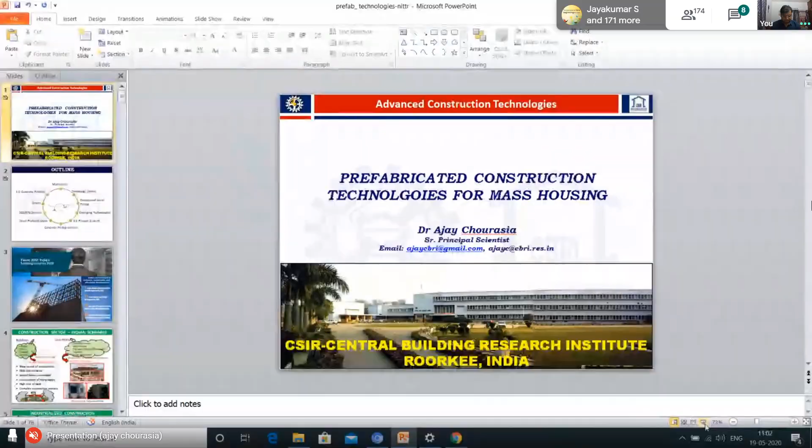Your mic is unmuted, actually. Unmute the mic. Yes, sir, your microphone is mute. Done. Okay. So now, am I audible now? Yes. Thank you so much. So, okay. So, shall I start now?

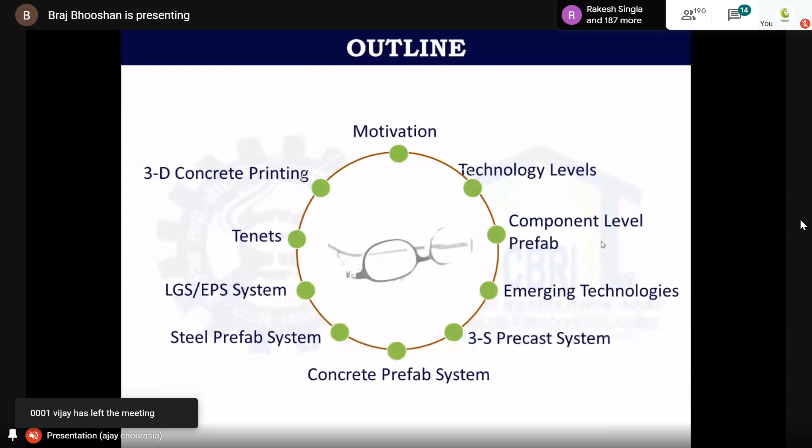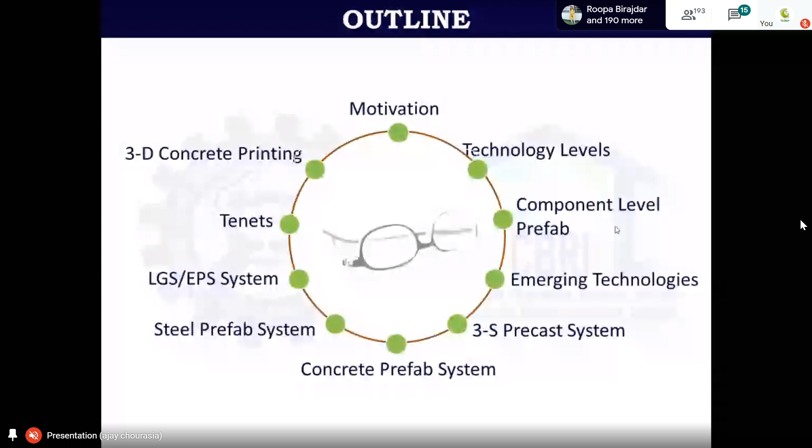Thereafter, there are different types of emerging technologies in prefabricated construction for housing or any building industry. That can be separated out in terms of the material used, that is concrete, steel, or light gauge steel, and different kinds of material for non-structural members like light gauge steel, EPS, and all. And then we will discuss certain things about the Tenets, what is the requirement for getting all these technologies into practice. Then the way forward, advanced technology, next generation technology, that is still at the evolution stage, that is 3D concrete printing. And at the end, as usual, a conclusion or summary.

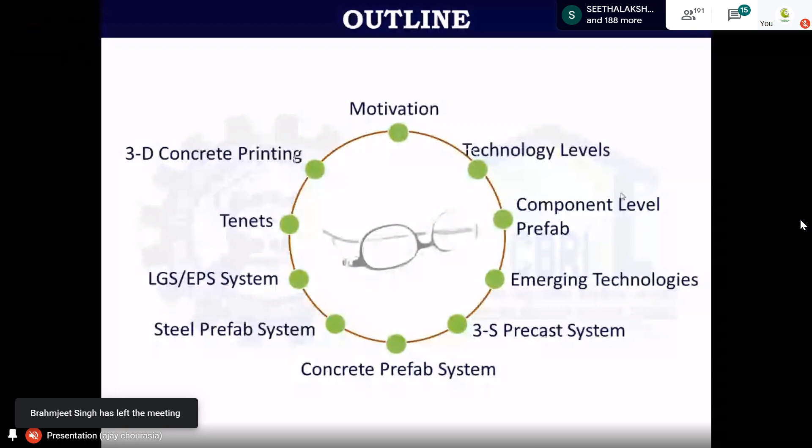So to begin with the formal presentation, I will put keywords for this particular presentation. It is on prefabricated construction, as directed to me by Dr. Goel. That is, the keywords are prefabricated construction, technologies, and mass housing. So my presentation will revolve around these three keywords only.

So when we are talking about mass housing, you know the Government of India has launched a very ambitious program on mass housing, that is Housing for All, which caters to the housing needs of the lowermost person or common person who is lying in the bottom layer of the pyramid from socio-economic considerations.

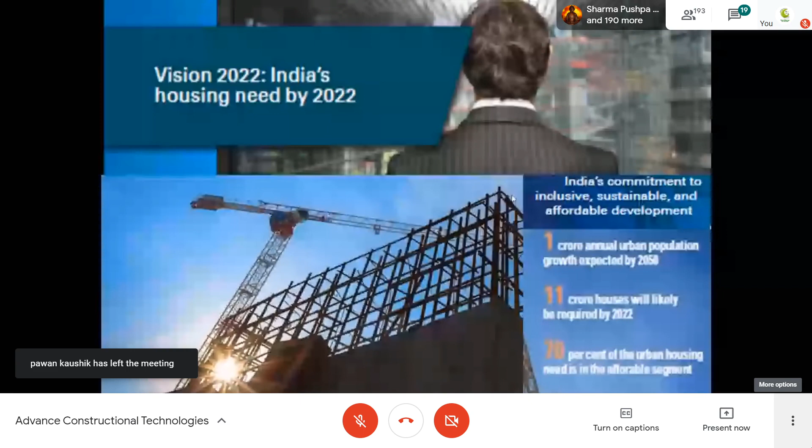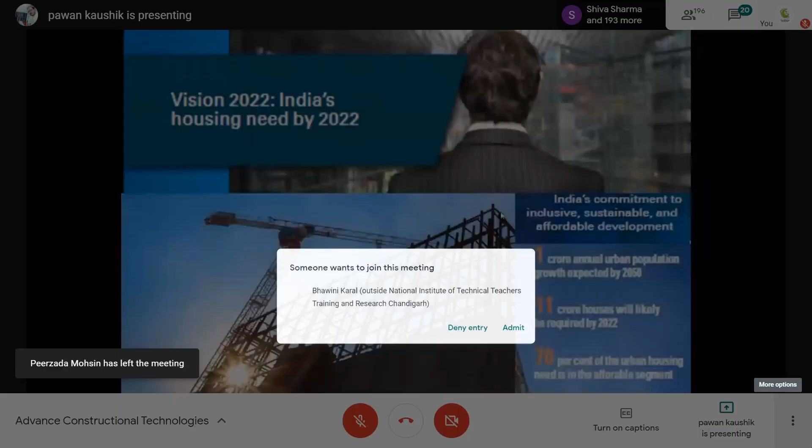So with this, the statistics say that our country is passing through a shortfall of housing for economically weaker sections and for the middle income groups. That has been again divided into two, that is urban and rural. In urban sectors, by 2022, we need at least 11 crore houses to be constructed, and this figure will go on increasing by 2030 and 2050, if we extrapolate it, by a tune of around 2 to 5 fold respectively.

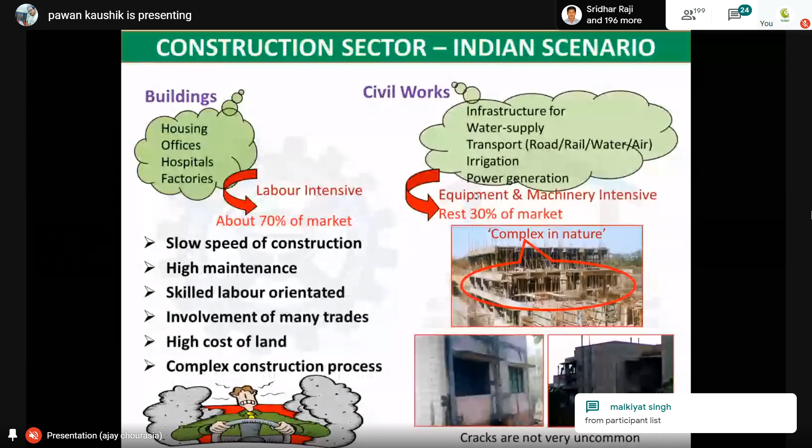Similar things are also reflected in the rural sector. So when we see this particular demand, and we have very good ambitions, and if we follow the present construction scenario which we are now practicing: if we look at the construction sector in India, 70% of the market share is in buildings, and the rest, 30%, is for civil infrastructure development.

And as you know, in the present scenario the construction sector is one of the key sectors or key verticals contributing to national development in terms of GDP, having around 12 to 15% share in the GDP of the country. If we strengthen this particular sector, definitely it will take our country to newer heights. And for that purpose, we have to intervene with technologies.

We are following traditional construction, or cast in situ or monolithic construction, which has a lot of impediments or shortcomings, I should say. The conventional technologies suffer from slow speed of construction, high maintenance cost, and are skilled labor oriented. It is a multidisciplinary approach with involvement of many trades, high cost of land, complex construction procedure, and quality control and quality issues, all in parallel.

So if we follow this similar trend, and on the contrary look at the demand we have in the housing sector in the country, it is a huge demand, and with the present pace we will be able to address only 15% of the construction, and due to this a huge backlog will be created. With this speed, to meet the target it will take at least 10 to 12 years. And what will happen to the backlogs generated during these years?

Certainly the supply is not commensurate with the demand, and for that purpose we need to go for technologies, and prefabricated or precast technologies are very important. We support these technologies for the simple reason that they are easy to handle, easy to transport, easy to cast. And for achieving this, we have to streamline our working style: standardization and modularization of construction systems, plans, designs, and housing systems should be done. To a large extent, it has been addressed in the NBC 2016.

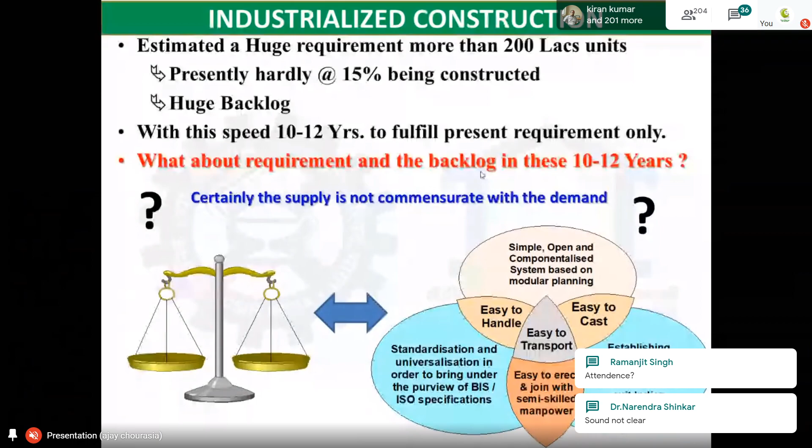Similarly, we have to take a multidisciplinary approach so that there will be good coordination between electrical, plumbing, and other things, because most of the problems in existing buildings arise from poor coordination between different verticals. If we look at the Government of India's Housing for All mission, the government is also looking for technologies that deliver disaster resilient housing.

So these are basically the needs: resilience to disaster, fire, landslide, rainfall, flood, and everything. Better quality of construction, low maintenance, speedy construction, cost effectiveness. Sustainability is nowadays given more impetus, that is, environmentally friendly materials should be used. Energy is also very important, and there should be a low carbon footprint.

Our Honorable Prime Minister Modi ji inaugurated the Global Housing Technology Challenge in Delhi, in which 16 technologies have been selected, identified, and classified as proven. Please try to understand the difference between technologies and proven technologies. Proven technologies are those which meet these needs, and only those technologies are recommended for use in practice, so that whatever our common people get, even if the building technology is new, it should be proven, so that tomorrow there is no blame game.

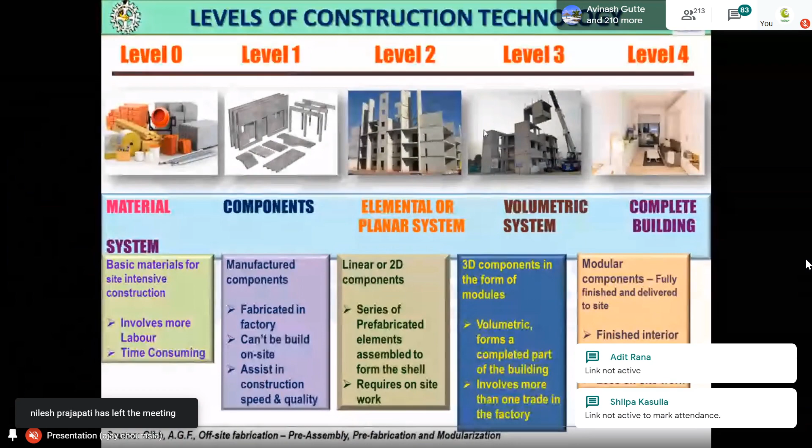So the way we are moving from level 0 to 1, definitely speed is achieved to a large extent. In all cases, we have to ensure that safety is addressed properly. Apart from that, sustainability, rebuildability, and reconstructability should be addressed. So we have to take it as a whole to reach level 3 and 4 with all our contribution.

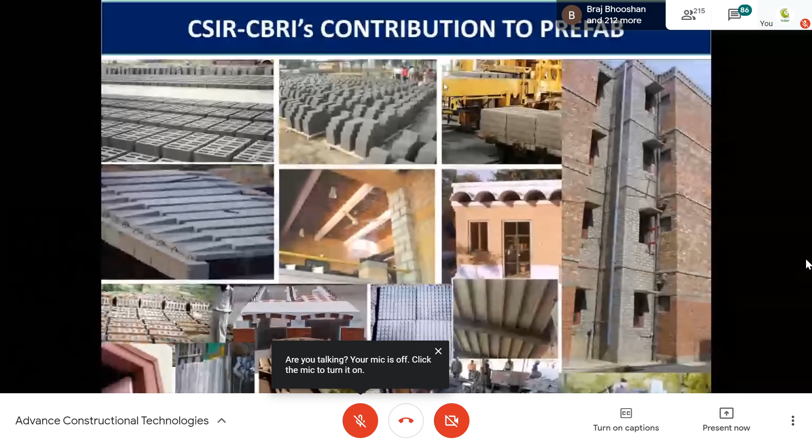So for that purpose, CBRI already envisaged all these aspects 3 decades back, and brought out different prefabricated or precast technologies, but again, it was on a component level. That is hollow concrete blocks, lightweight blocks, RC plank joist systems, brick panels, roofing systems, and at the same time, to increase the manufacturing process, semi-mechanized production of precast building components has also been done to a large extent.

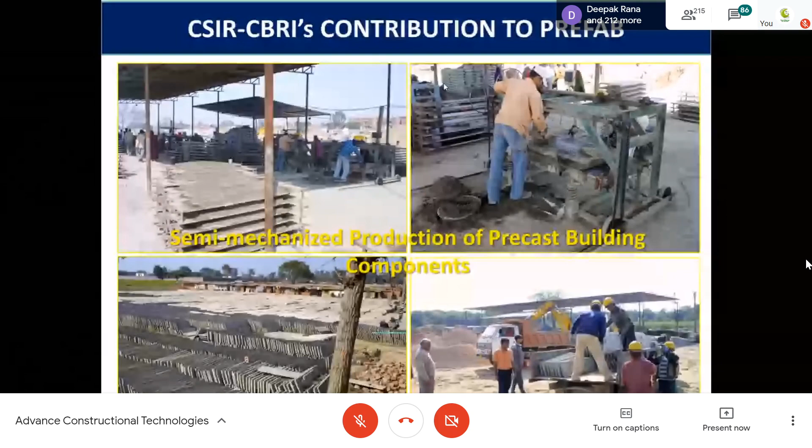So the advantage of these precast construction technologies is simple: it is done under strict quality control. The mechanization is in between, and with standardization and modularization you have to be very careful, and extra careful during transportation. If you don't take proper considerations, then minor hair cracks or damage or distress to the component are likely to happen during transportation, so you have to be very careful on this front.

So mechanization has also been embedded in the technologies developed at CBRI, which have now been put in several locations across the country, specifically in the housing sector, in the urban and rural sector. I'm very happy to share with you that in the last 6 months, 3 lakh houses have been constructed in Orissa state using these technologies, and importantly, in the latest cyclone they performed exceptionally well.

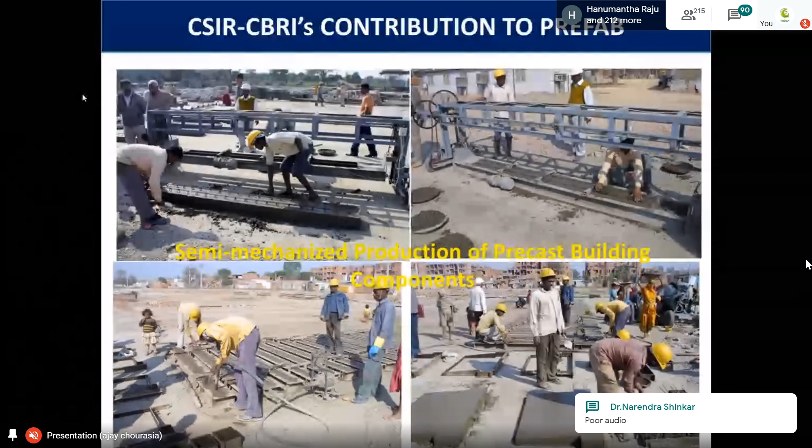And whenever you are bringing any technology to the common man of this country, you have to be extra careful that it should be socially and societally acceptable. Whatever technology you give, ultimately he has to spend his life in it, and if it is not meeting the comfort level and functional needs of a common person, then it makes no sense.

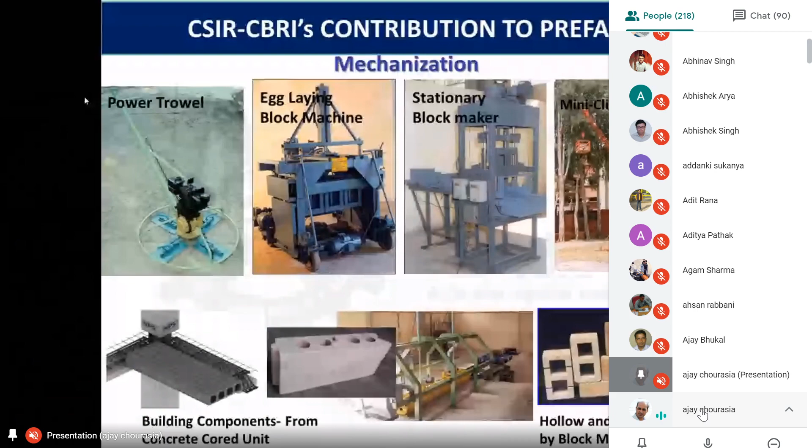So apart from this, some mechanization has been done by CBRI to give accelerated speed to the construction process by making use of power trowels and egg laying machines. So basically it is a manufacturing process of the blocks, then stationary block making machines, then mini climbing crane, then hollow core units. So these are some of the building component mechanization interventions CBRI has done in the last 3 decades or so.

If we look from CBRI to the market, we will see a lot of things happening at the site, and it is up to the engineer in charge at the site to put these technologies to use, so that minimum intervention of manpower, speed, overall economy and safety aspects are addressed properly. So,

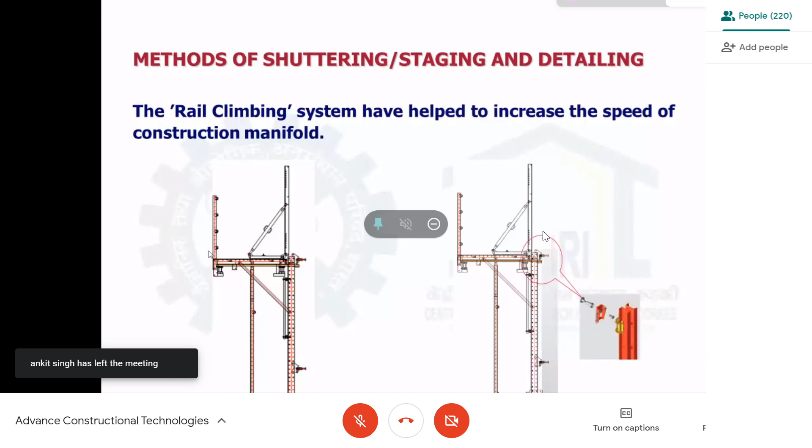So I'm sorry. So for that purpose, if we see the shuttering aspect, there are now technologies, and I'm again going by what is happening in the market. So rail climbing is another technology. A single person can handle this equipment and do its day-to-day work fast.

Then the method of shuttering. Gone are the days when we were depending upon props in terms of ballies or hollow circular pipes and all. Now there is a technology which is very light in weight, good in strength, very easily flexible. When you are varying the height of a building, that can be managed properly.

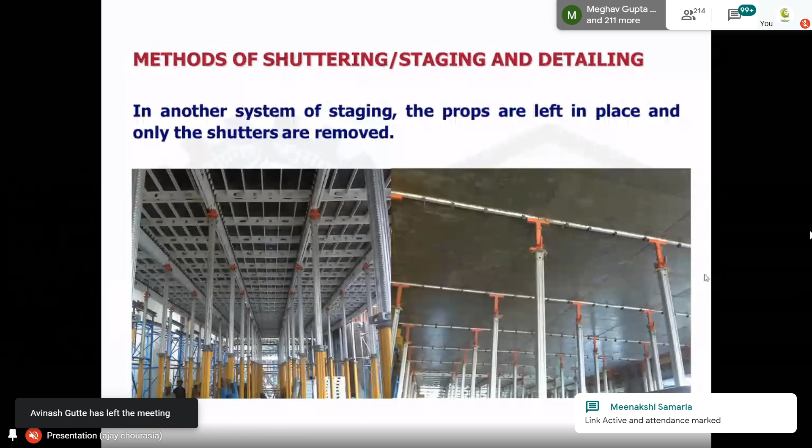And when you see the casting of a slab, what happens? Normally you will see, okay, the slab is cast, we will remove the shuttering after 14 days. Why? The code already says that you can remove the shuttering from the soffit of the slab after 3 days, depending on the span and other things, and you can keep the props for 7 days or 14 days, depending upon the span of the beam.

And what we do, because of lack of knowledge, we are keeping the entire shuttering for 14 days, 21 days. So many people have their own concepts, and as a result, our cycle time per storey is getting increased exorbitantly. But these are the new shuttering technologies in which you can remove the beam slab shuttering within the specified time, and you can leave the props as they are, and they are very flexible.

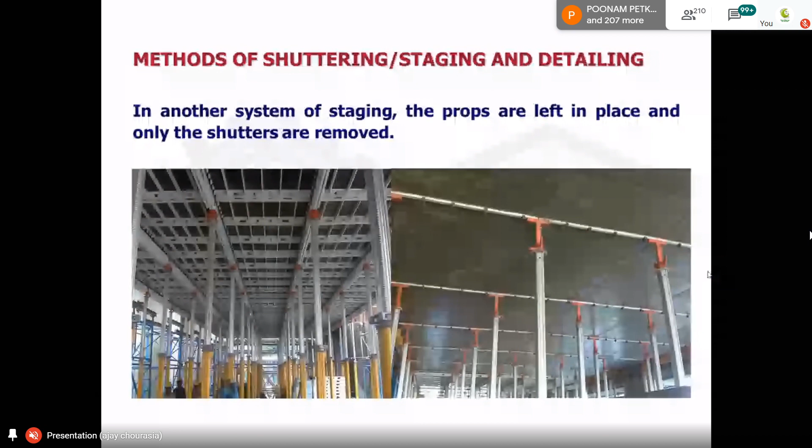If there is a variation in the storey height, most of the times you will see at the site people putting bricks as packers, 1, 2, 3, 4, I don't know how many, and most of the times accidents are happening just because of dislodging of those brick layers. So to avoid that, adopt the technologies, make your construction safe and get good construction output.

Another component which has been attempted is couplers. When you see reinforcement laying or connection of reinforcement in the construction sector, traditionally we are following lapping of the reinforcement bars. We lap by the anchorage length, that is, in case of M20 grade concrete, 48 times the diameter of the bar. And it is a very challenging aspect when we are going for higher diameters. Alternatively, we can make use of couplers.

Our IS 13920:2016 also recommends making use of these, subject to evaluation of the couplers from mechanical considerations. The advantage of using couplers is that, as our code 13920 suggests, laps should not be more than 50% at one particular section. But when you are using couplers, you can go for 100% at one particular location.

Now, what is a coupler? A coupler basically means the end-to-end connection of reinforcement bars. These are the couplers; they are internally threaded, and they are connected through the threading end-to-end to the reinforcement bars. When you see the cost economics, these are very feasible from 16 mm dia to 32 mm dia. But below that diameter, the cost efficacy doesn't work out.

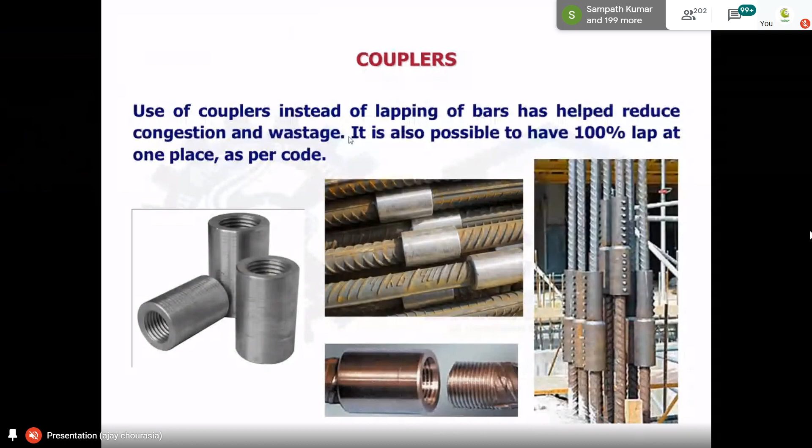Whenever you see the post-earthquake damage scenario, you will find that the beam column joints are most affected. The reason behind that is the reinforcement detailing given by the ductile detailing code 13920 is not being followed. Even if the designer gives it, at site it is unable to be attained because of congestion of reinforcement. Due to congestion, honeycombing happens, and as a result, you compromise the designed beam column capacity.

Most of the times you recommend that an L bend should be given at the joints, but at the site, maybe because of different reasons, it is not possible. It is ignored. What is the way out for that?

So we have designed a headed bar. Headed bars are basically a mechanical anchorage system. It is attached at the end of the reinforcement bars, and this is a very good application at the end span region. The reinforcement bar is inserted within the beam column joint at least to half of the depth, and it is connected either by threading or by forge friction welding.

And what is the novelty of these headed bars? Easy workmanship, cost effective, fast construction, enhanced bond capacity, better ductility, whatever the capacity you achieve by the headed bars for the beam column joints. And it can be implemented in cast in situ construction as well as precast construction.

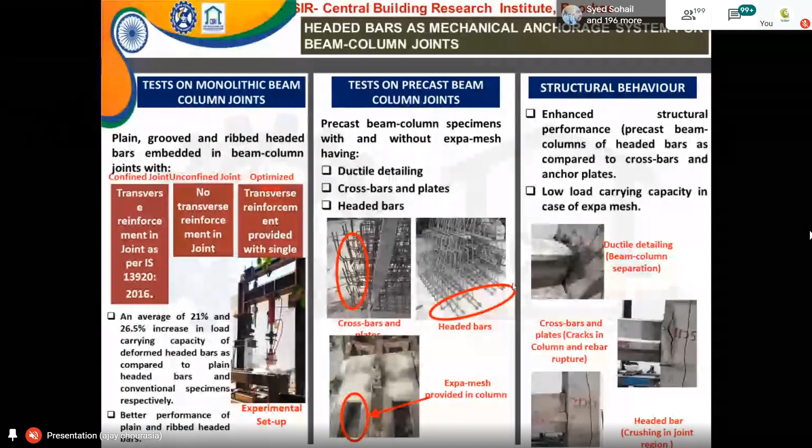So when this technology was evolved at CBRI in the last 1 or 2 years, before bringing it to the code, it had to pass through different tests. So we have conducted several tests on this, and as a result of the tests, the techno-economic feasibility also we have worked out.

So here we have observed that these coupled headed bars, techno-economically, without compromising the capacity of the beam column joints, are very feasible for bars more than 12 mm diameter, up to 32 mm diameter. As a result, the saving is very small, around 5%, for 12 mm diameter, whereas it is to the tune of 60% when you are using 25 to 30 mm dia bars. At the same time, it is adding speed and other quality aspects.

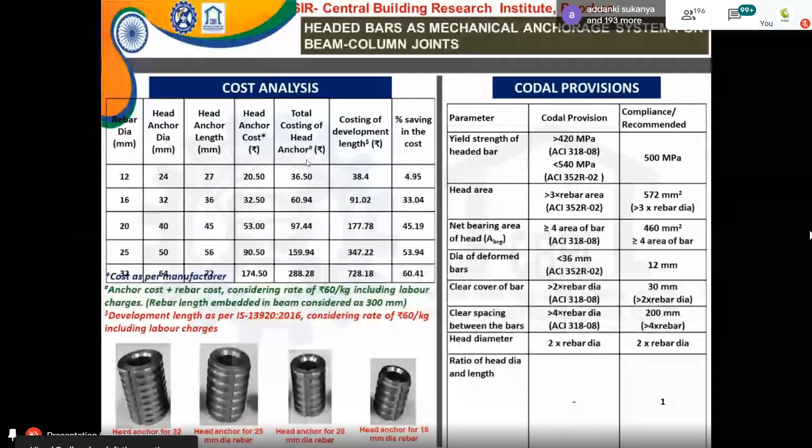So this particular technology can also be implemented for getting better beam column joints in our building systems. Because whether it is a building or a human being, joints are very critical, very important. So that's why this is one of the new innovations which we have added recently, and this will be embedded within the code of 2020, which is under development.

Now, again, when we need to add speed to construction, mechanization is the only way out. This will reduce the manpower requirement, and safety and speed will also be added to our prevalent construction technologies. You see cranes being used in high-rise construction by big contractors. We want to make these cranes affordable for two-story, even three-story buildings. We very rarely see cranes being utilized for 2 to 3-story buildings. But with technological interventions, we made it.

In this, you don't require a huge platform for installation. The cost is also low, and you can mount this crane on the floor, and it can be movable also. The capacity of the crane can be varied. We have designed it for 4 ton per meter, which is within the normal construction of housing sector buildings. So we are naming it an affordable mobile crane.

Apart from that, when you go for finishing of a building, a plastering machine is also very important, which we have developed. Again, it is cost effective, and it is portable. It gives a good finish, very fast. And the USP of this plastering machine is that if during plastering you come across any opening, it is embedded with sensors. Whenever the opening comes, the sensors will not allow the pump to spray the plaster mortar on the wall. As a result, you reduce the wastage, and it is adding speed.

And what is the process? The tray is moving from bottom to the top, and whatever rebound plaster mortar you get, we collect in the tray provided at the bottom. So wastage of material is also reduced, and it is affordable. There are several plastering machines available in the market, but this is something different and can be adopted very easily in ongoing housing sector projects.

Then, more prevalently, we are used to using burnt solid clay brick units for walling systems. But nowadays, if we follow brick units, it will take a longer time. So alternatively, there are a number of products coming in. That is AAC, autoclaved aerated concrete blocks.

We have come out with lightweight cellular concrete panels, almost 600 mm long, 140 mm or 200 mm width depending upon the loading, having good compressive strength. In between, it is made hollow, so the weight is reduced, and it accommodates the reinforcement bar and connectivity along horizontal as well as vertical direction.

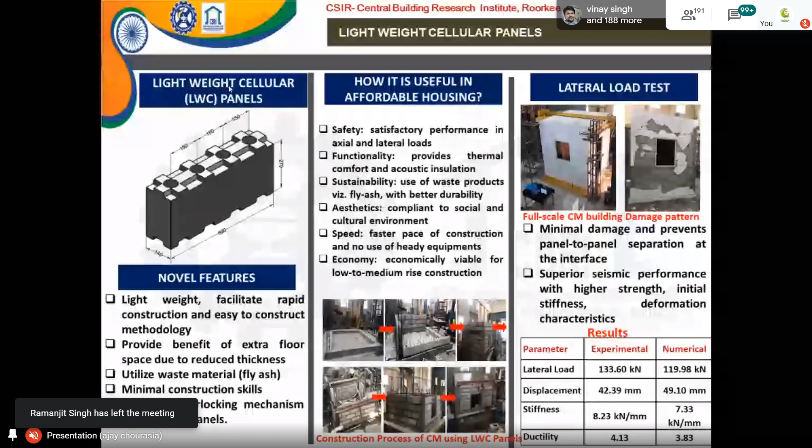What is the USP of these blocks? It is basically safe for axial and lateral load, very fast in construction, and good from a functionality aspect in terms of thermal and acoustic insulation. Sustainability is a very important aspect we have added, because it makes use of a waste product, that is fly ash, with good durability.

Aesthetic is also better, with very good interlocking between the units, and it gives enormous speed. If you are making any construction by conventional practice versus using lightweight cellular panels, you will definitely save to the tune of 70% of your time, apart from 20% of cost.

So this is a promising technology which can be used either as infill walls or for load bearing structures as well. For that purpose, we have gone into various kinds of tests, which I will not go into at the moment.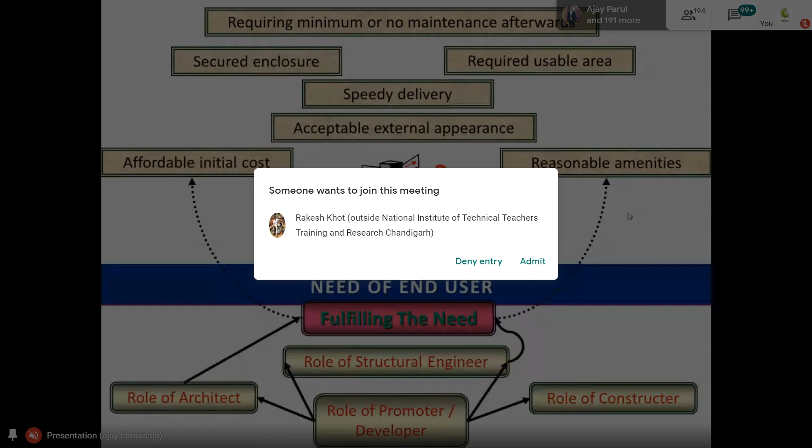Now, after learning these technologies on the component level or mechanization point of view, we need to go from component level to system level. But before going to the system level, we need to understand the end user's requirement and thinking, because he is my customer. For that purpose, what he looks for is affordable - economy is the prime concern.

Thereafter, he wants speed, then acceptable external appearance, comfort level, thermal and acoustic insulation, reasonable amenities it should embed, required usable area it should get, the enclosure should be secured, and it should require minimum to no maintenance afterwards.

To meet the aspirations of the user or common man, we need better coordination among different stakeholders. Who are the stakeholders? The owner is already there, but apart from that, architect, structural engineer, government has to also be on board, and the role of the promoter, developer, builder, constructor - everybody has to sing in the same tone, then only my customer will be happy.

So with these basic requirements or prerequisites, you have to address them through technological intervention on a system level. For that purpose, we again have to take help of technologies. When we look at technology on a system level in our country or across the globe, we see there are majorly three verticals.

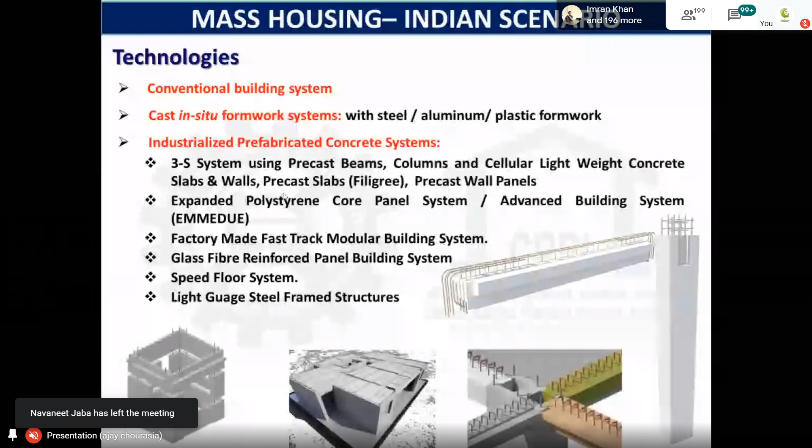Apart from that, there are other technologies - expanded polystyrene core panel systems, fast-track modular systems, GFRG, speed floor construction systems, which basically make use of steel structure building systems with any kind of infills, light gauge steel frame buildings, and stay-in formworks are always there. When the Ministry of Housing and Urban Affairs looked broadly at that, with CBRI also part of that selection process, we outlined these technologies in verticals: precast construction, large panel construction, tunnel form technology, lightweight construction technology, cold form steel, GFRG and EPS.

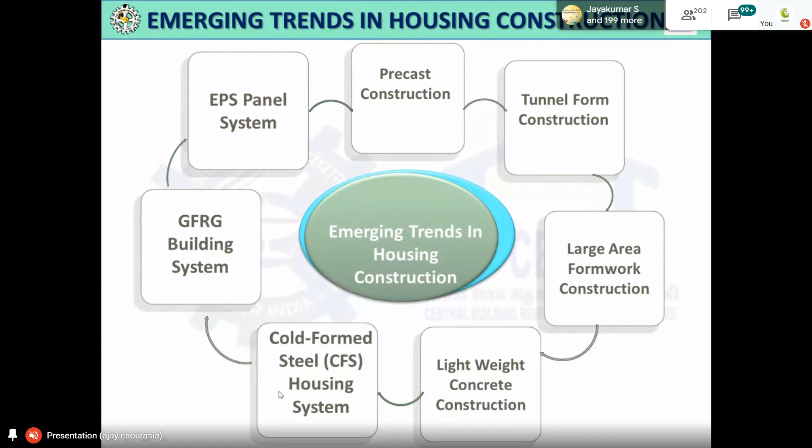So what are these different technologies? Let us go into detail. But before that, I will tell you what exactly you understand by means of the proven technologies.

With the case study of a 3S building system, 3S is a trade name, which is basically B.G. Shirke Construction Technology Private Limited, Pune, the pioneer and patented technology there. But CBRI is involved from time to time, including IIT Mumbai, for evaluation of this system.

So what are the tests we have conducted? I will share these things. Basically 3S stands for strength, safety and speed, but with the change in time, sustainability has also been added, so now we can say this is a 4S system. Basically it is a component system in which components, either in the form of a column, beam, or slabs, are manufactured in the factory.

By the time these components are getting manufactured in the factory, the foundations are done conventionally as per the site requirements, loads and soil investigation report. Once you finish your foundation work, all this superstructure manufacturing— I'm saying the word manufacturing because we are not doing this one or two at a time, it is in lakhs.

Again I want to pinpoint a very important aspect: what do you understand about mass housing and these precast technologies? These technologies are feasible for mass housing projects only. If you want just one single unit or 10 units, the cost viability will not give you a promising output. So for mass housing, you have to have a fixed sum of orders—only then are the mass prefabricated technologies very successful.

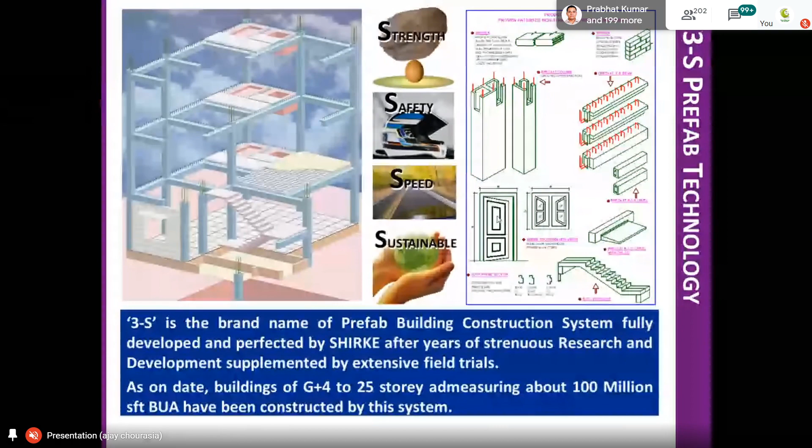So apart from that, the staircase, chajja, and all these components are manufactured in the factory, brought to site and assembled.

So this is the picture which shows this. These are the precast columns, precast beams, precast slabs. Then these are the Siporex slabs, very lightweight slabs, and these are the RC wall precast.

Or otherwise, if you have a lift, the entire lift can be manufactured at the factory and brought to site, and put together layer by layer the way you are doing brickwork, and connected appropriately so that your lift well can be constructed within a week or so, for when you take a case of a 10-story building or so.

So basically, to understand better how this particular technology executes, this visual is very clear. In this, the prefabricated precast columns are here, and with the protruded reinforcement with notch, the precast beam has gone and fixed into the notches, so that because of these notches, you did not have to put any support mechanism.

Once it is fixed, then you are placing the slabs, and after which the reinforcement is also anchored properly at the beam-column joints. After the slabs and beams are connected properly, you are placing a minimum screed concrete into it, nominally reinforced—a 40 mm thick concrete is placed on the floor, so that gives a rigid diaphragm action between the column, beam and slab.

So the advantage of placing this reinforcement in the screed concrete is control of cracks and giving the integral diaphragm action. This is achieved, and this is a very fast process—only you need to do the assembly part.

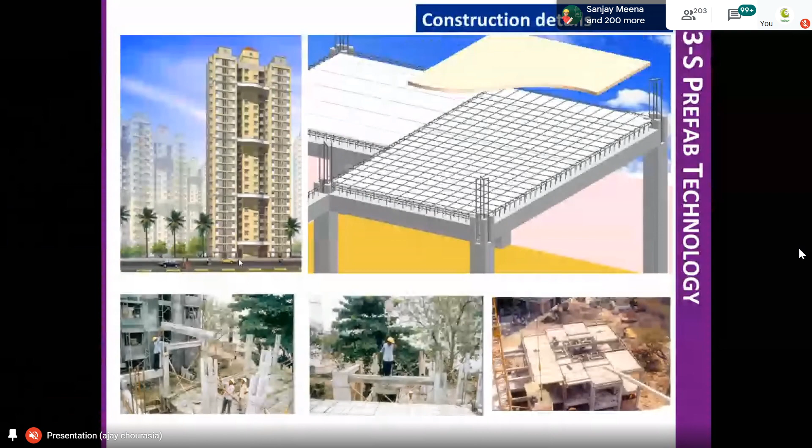So you can see the next building here. This is a building from Navi Mumbai, 24-story, constructed within a span of 8 months, apart from the foundation—right from foundation to the top to finish. The pictures at the bottom show how the erection process is being done, through visuals and in the actual site. But now it is very interesting to see how the production is happening in the factory.

The reinforcement cutting and bar bending is not done manually, but controlled by CNC machines as per the actual detailed drawing. This is the production facility for straightening, cutting, bending, caging, and meshing, all done at one stroke. The advantage of this process is that wastage is minimized.

After the reinforcements are cut and placed, the next step is the casting of precast columns and beams. The production facility uses carousel systems for columns, walls, and slabs. Multiple beams and columns are cast in series, and here is the precast RC slab, a full panel cast as per site conditions.

Sometimes AAC concrete blocks are required, and these are also manufactured in the factory. The advantage is very good thermal and acoustic control. The only drawback is that compressive strength is very low, around 4.5 MPa, but density is also low, around 450 to 600 kg per meter cube.

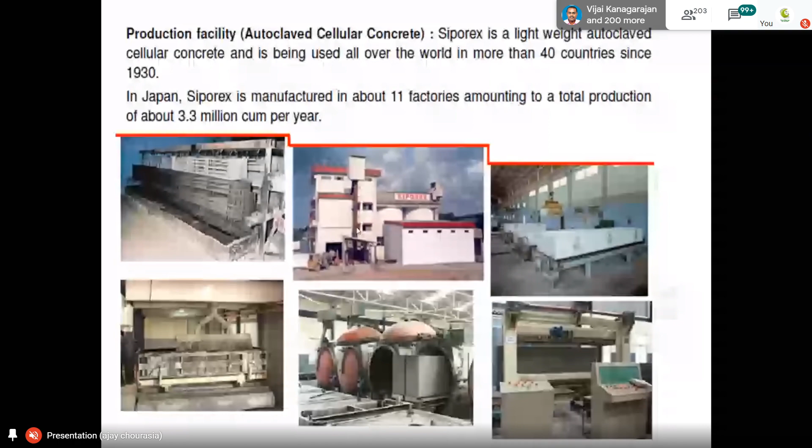After casting, smoothing and finishing is done, and this element is embedded into the chamber for curing, completing the construction. Whatever concreting and other work is done is under strict quality control in terms of strength, which is very difficult to maintain at the site.

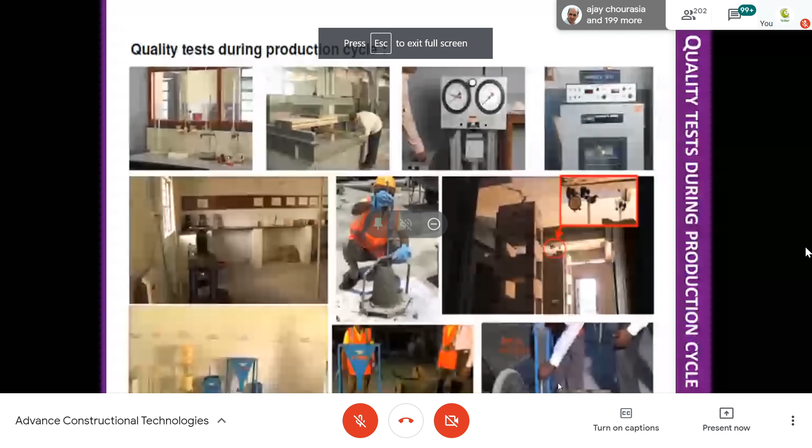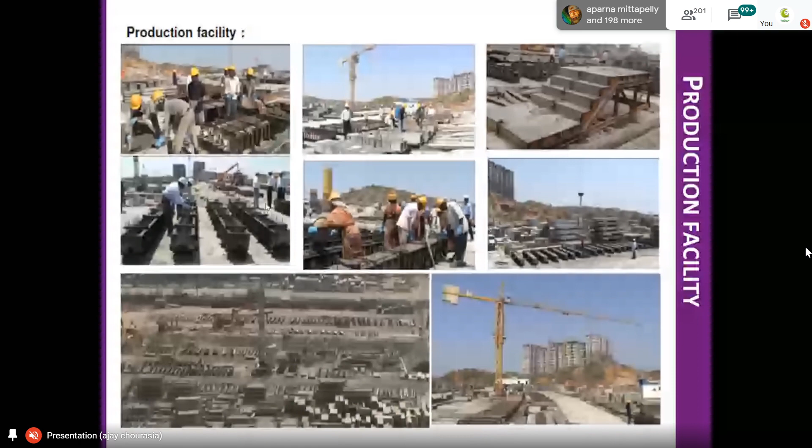When manufacturing, a large number of building components are generated, so they are systematically stored at the factory, and dispatched to site whenever needed. You have to be very careful in transportation, providing proper cushioning, otherwise bending and minor cracks are a common problem. Extra care is needed in transporting any precast building system, regardless of technology.

This is how the casting of large building components is done at the site. Next is the erection and assembly. Once these components are brought to site and assembled, additional reinforcement is provided at the joints for good connections, and then the hollow portion in the columns is filled.

This achieves strength 5 MPa plus higher than the precast elements, giving monolithic construction objectives through prefabricated building components or technologies. This is basically the process being followed.

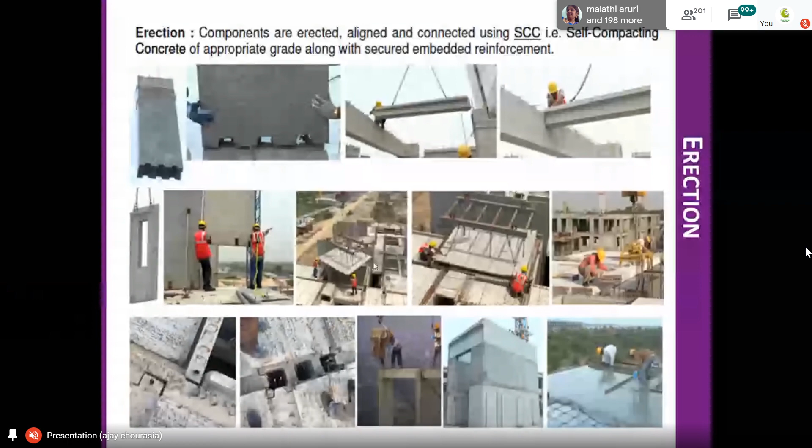Before taking these technologies to market, they must be tested in the laboratory. It has been tested at the component level at IIT Mumbai, and at the system level for dead load and dead load plus live load for higher storeys at CBRI. This picture shows a full-scale 2-story building tested under lateral cyclic displacement controlled loading for evaluation of building components and joints for seismic safety.

During testing, we got very good beam-column joint performance. Out of curiosity, we checked whether there was any separation within the hollow portion that had been poured. After that, we took core samples and examined the interfacial transition zone. There was no separation, which gives a promising indication of good monolithic action for this technology.

Based on the test, we added interventions into the beam-column joint so that when implemented at site, it performs exceptionally well. After incorporating the suggestions given, it will ensure safety.

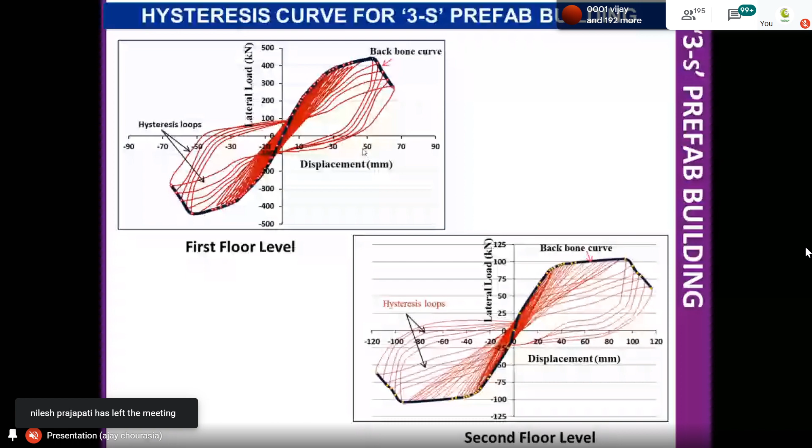We are more concerned about the lateral load, apart from dead load, live load, and lateral load. In the testing, we generated this load-displacement curve, which is the hysteretic loop. The larger the area under this curve, the better the energy dissipation capacity, which is needed, and that has been achieved. We also observed a good amount of displacement without collapse, and measured inter-story drift to the tune of 1.78% as against 0.4% mentioned in our code IS 1893.

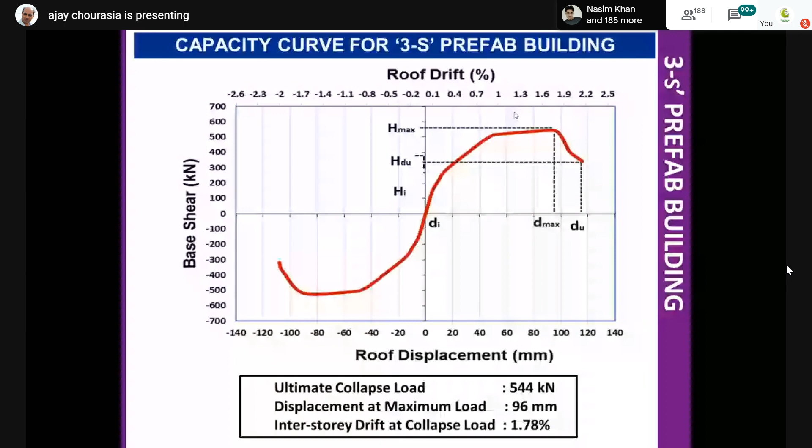So the way we have gone into detail about the 3S technology, similarly, other technologies are also there. So now I will take you on a journey to the different types of prefabricated or precast construction technologies which are prevalent in this country. Please be careful while using the terminology precast and prefab. Precast technologies are those in which the casting is done prior to being brought to the site and assembled, so this is basically the RCC structural system, whereas the steel structural system or light gauge is categorized under the prefabricated building systems.

So when you are talking about the prefabricated or precast construction technologies, one technology is called monolithic concrete construction technology, which is basically similar to the conventional mode of construction of RCC frame building systems with infill walls, whereas in this particular system, the casting is done only at the site. Cast in situ monolithic action is achieved. Only thing is it is done by means of a designed modular formwork made up of aluminium, plastic, steel, or composites. Most of the time in market, you will come across Mivan construction. In Chandigarh, you will find a lot of construction happening using Mivan technology or plastic formwork.

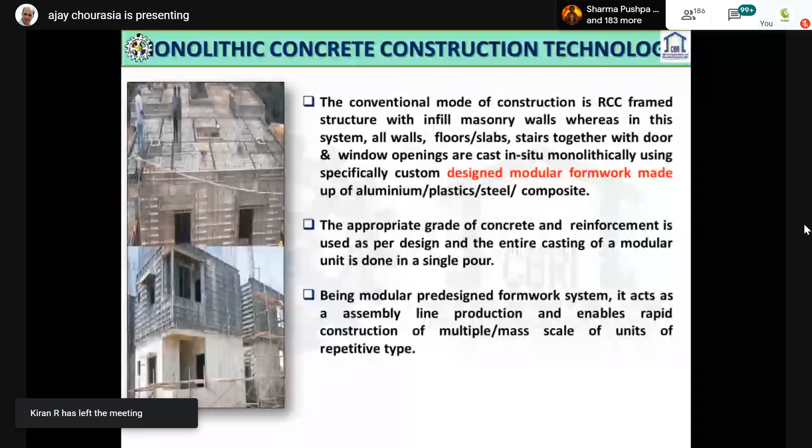By the time your foundation work is completed, reinforcement is erected and placed at appropriate locations, then erection of this formwork, and then cast in situ concrete is done within this formwork, and this formwork is removed at appropriate time, that is mostly 24 hours for vertical elements and 3 to 4 days for the horizontal elements. So definitely finish is exceptionally good, and the advantage of this monolithic concrete construction is that it gives an integral monolithic action between the vertical element, that is wall, and your slab.

So in this case, while designing, most of the times you will get reduced thickness of the walls and slabs because of integral box action both in horizontal and vertical plane, and as a result, it reduces the consumption of natural resources, as well as improves speed. You will achieve at least twice the speed in contrast with the conventional technology. Apart from that, in this technology, the cost of repair and subsequent maintenance during its service life can also be reduced to a large extent.

So this is very widely being used next to the 3S system, in multi-story construction in northern India as well as across the country. Definitely, safety, serviceability, all tenets are being addressed properly. So this is how the construction normally happens using this technology: the foundation work is done as per the site conditions and the load you get from your design and analysis process. Then erection of reinforcement, placement of the appropriate formwork system, and then the casting, which is done in monolithic fashion.

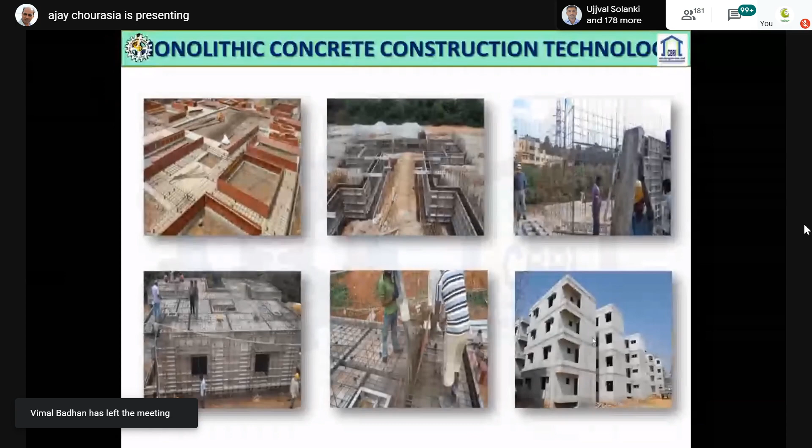So this is called a removable formwork system. There is another technology, which I will come to in the next few slides, in which these formworks are left there. That is called stay-in-place formwork. We'll see that later.

Initially I will be discussing concrete technology in precast constructions. Modular tunnel form technology is another technology, in which the tunnel formwork is a mechanized system for cellular structures. It is based on two half shells which are placed together to form a room or a cell. This simulates the conditions of a tunnel, and it is done in a single day. In this case, the cycle time is reduced drastically, and as a result you achieve great speed. Safety is also ensured.

Another construction technology which is prevalent is precast large concrete panel systems. In these systems there are various precast elements. It is similar to the 3S system. The various precast elements, in the form of walls, slabs, beams, columns, staircases, landings, all projection systems, are manufactured in the factory, brought to the site and assembled.

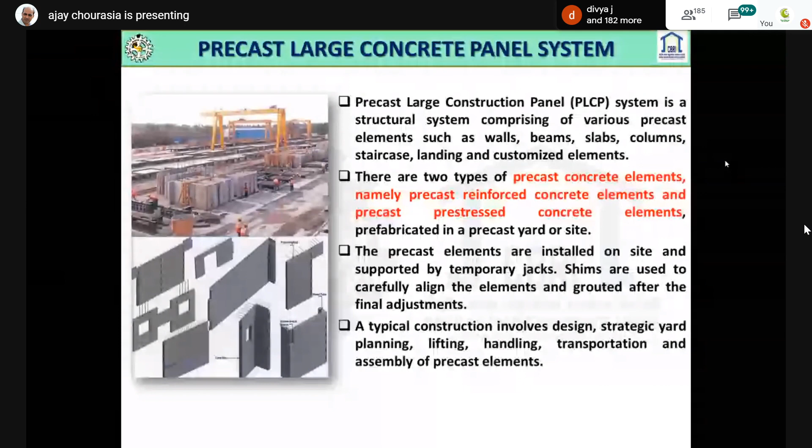So this is a 2D. When you see the label, it is level 1. It is brought to the site, and it involves the design, strategic yard planning, lifting, handling, transportation, and assembly of the precast system. Good connections are of prime importance in all precast systems.

Next is precast and pre-stressed prefabricated technologies. In the earlier one, only reinforced precast was done. In this one, in addition to precasting, pre-stressing is also done. This system is called pre-stressed precast RCC technology, and there are different approaches using hollow concrete core slabs, beams, columns, and solid walls.

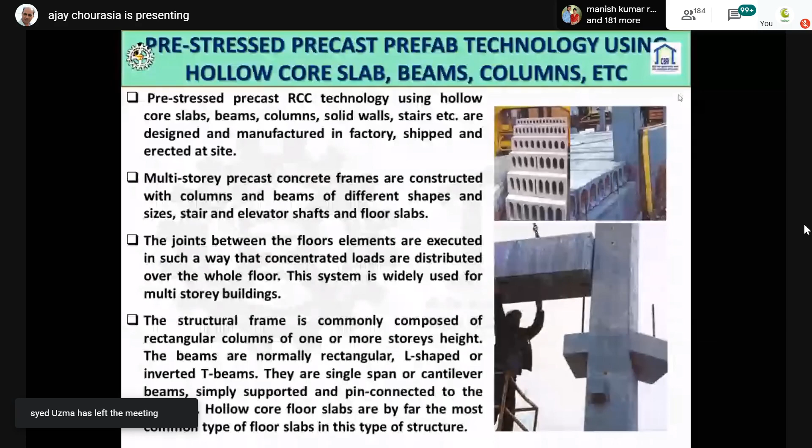The advantage of this system is that it can be used for large span structures, and due to the concrete hollow cores, it is very good for accommodating service lines, electrical and water supply conduits. Importantly, it gives very good thermal comfort and acoustic comfort, apart from saving material and reducing the dead load. This is one of the technologies which has been practiced very widely in our country.

Now, from concrete, I am switching over to the stay-in-place formwork system, that is Sismo building technology. It is a patented technology. It makes use of insulated EPS as a shuttering kit. The EPS boards are placed at different locations, and according to that it is categorized into different categories. I will come to that module later. This EPS is provided with welded galvanized steel wire mesh in the form of a lattice. Afterwards, the welded wire mesh provided outside is plastered or shotcreted to have a good finish.

There are different types of modules of this technology available, in which you place the EPS strips either inside or outside the insulation. Based on where you place these EPS strips, you provide the welded wire mesh appropriately to give proper stiffness and strength to the EPS.

Sometimes the board is deployed inside, with outside insulation. The advantage of this EPS provision is that it provides the formwork system, and at the same time it stays in place, so it gives good thermal comfort as well. Sometimes it is inside and outside. These are the different modules which are used in practice quite often.

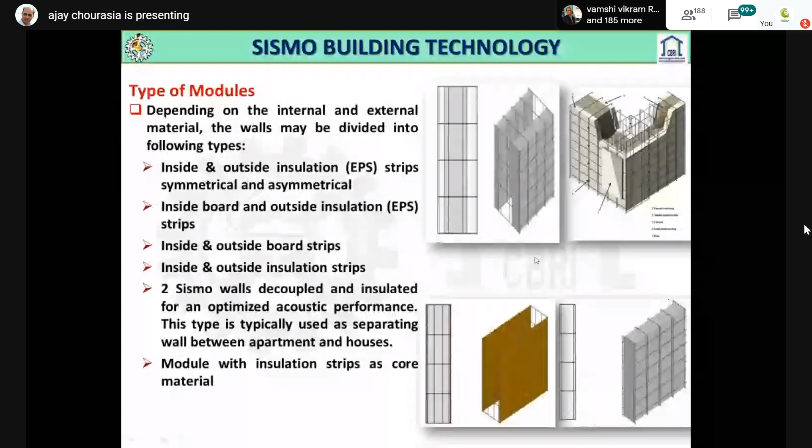Another system is factory made fast track building systems, in which the skeleton beams and columns are made in the factory. It makes use of hot rolled steel structural elements, either I sections or hollow box sections. If hollow box sections are deployed, they are sometimes filled with concrete, which gives additional strength. Then there are different kinds of infills.

Non-structural elements are EPS panels, or gaps filled with boards and insulation. Lightweight concrete is normally used, but placing lightweight concrete between two fiber cement boards is a difficult task at the site. So for that purpose, nowadays people are also using EPS concrete. As a result, you get a very lightweight concrete with good thermal insulation and comfort.

The disadvantage of the previously discussed RCC elements is that thermal comfort in RCC elements like walls is not achieved properly, because over the course of a day they get heated, and until 11 or 12 o'clock at night it's still hot. So it is not giving good comfort, but this is the solution to achieve a good comfort level within the house in a hot or hot humid region.

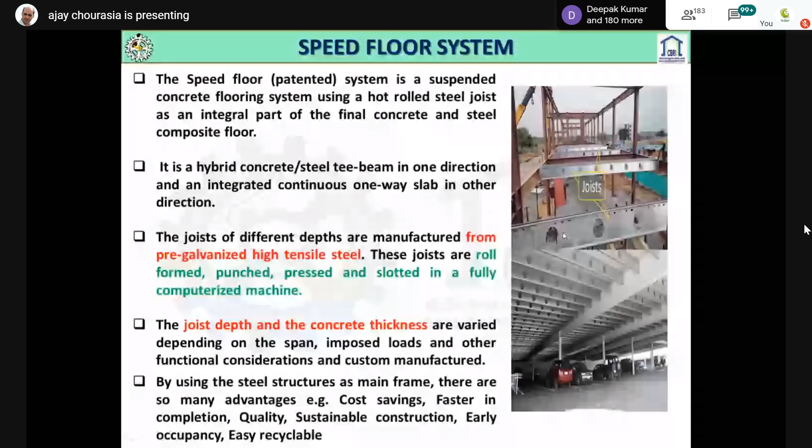The ultimate advantages of this system are cost saving, faster completion, quality, sustainability, early occupancy, and easy recyclability, because GI is used, and it is lightweight. The slots or punches provided in the joist can be used for multiple purposes to accommodate the service lines in the building, and you can do a false ceiling and hide them.

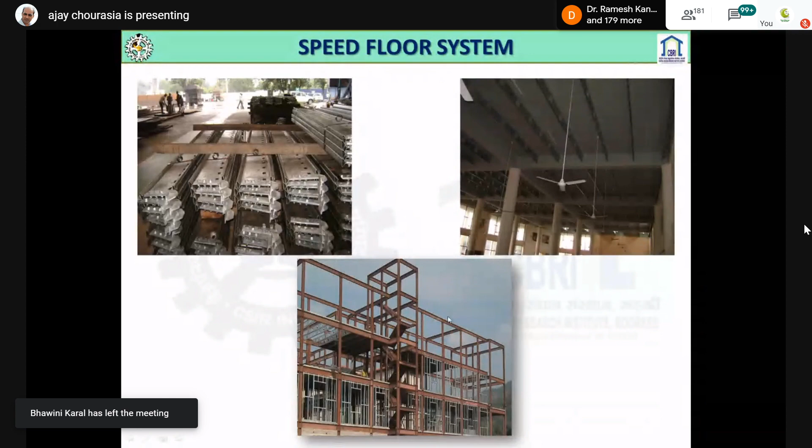So you can see these are the joists, and at the ends they are not connected by means of welding or nut and bolt. There is a latching system, as you can see here. So this is fast execution, and these joists can be used for suspension of different accessories.

The next technology is light gauge steel frame systems. As the name suggests, the light gauge steel thickness may range from 0.6 mm to 0.9 mm, and it is widely used for 3 to 4 story buildings. It can be load bearing or framed structures. When it is used as a framed structure, you have to provide certain steel sections depending upon the spans.

Normally, to encase this light gauge framing system, it is provided with lightweight boards, fiber boards or cement boards, and the gap is filled with lightweight concrete. So that becomes a load bearing element. It is very well suited for 3 to 4 stories, with good thermal comfort, and better seismic resistance will definitely be achieved because of its light weight.

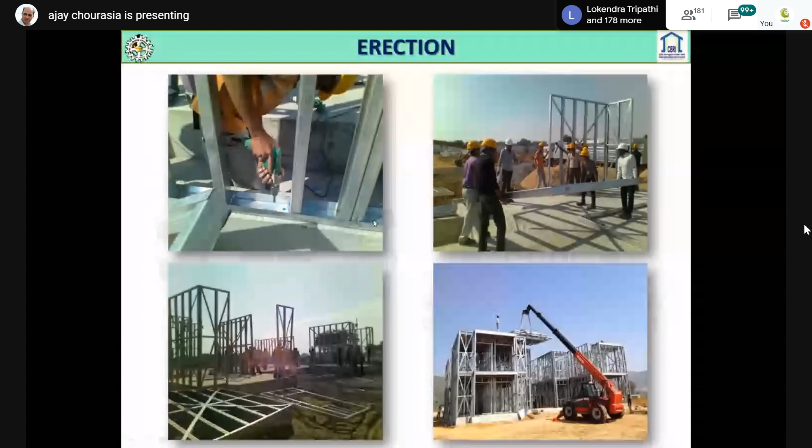So how is the erection of this system done? After the foundation, the plinth beam is laid, and the light gauge channels are fixed to the floor by means of self-threaded fasteners, equally spaced, and then the assembly is done and the erection can be carried out.

Then there are other systems. This is again a very promising technology, but it has yet to see the light of day in our country. It is ModuCast, which is again a patented item, a volumetric system, semi-finished, level 4 or level 3 as shown in my previous slide. The ModuCast building system is volumetric construction. It is totally manufactured at the factory, the total unit is transported to the site, assembled, connected well, and later finished.

So this is the system. The only thing is you have to achieve good connectivity between the different elements. It can be from a single story up to 10 or 15 stories, as per the design conditions. There are different stay-in-place formwork systems, as I mentioned earlier.

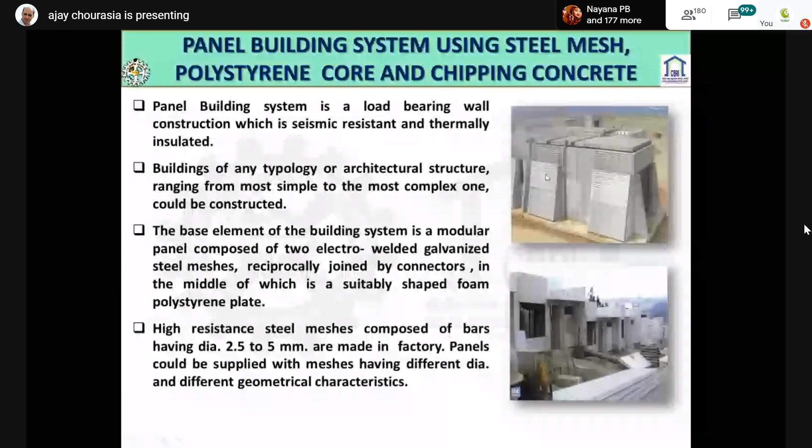In most cases, people provide EPS or other lightweight material, then welded wire mesh on the surface, and then it is either plastered or shotcreted to give a good finish. So this is how the stay-in-place formwork EPS panels are done. You have to be very careful at the corners, where additional diagonal mesh may be provided, and then plaster, to control cracks if they happen during lateral loading or seismic events.

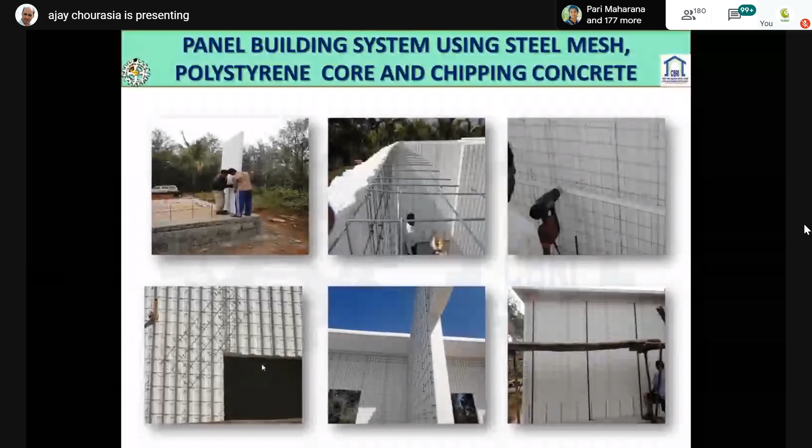So this is the last one, insulated concrete formwork or stay-in-place formwork system, which is just contrary to whatever I have discussed previously. This is basically a sandwich system or hybrid system. It makes use of RCC walls as well as EPS. This is called an insulated concrete formwork system, comprised of two panels or two walls of EPS, separate, in which the adequate reinforcement and casting of concrete is done after these EPS boards are placed.

So basically these EPS boards generally have a thickness of around 60 mm. It is corrugated so that it is connected properly with each other, and on the outer surface it is semi-finished, and concrete is cast, so no shuttering is required. The reinforcement and the thickness of these walls are driven by the number of floors you are going to. So this is also one of the technologies, but this technology has not been implemented in Indian conditions as of now.

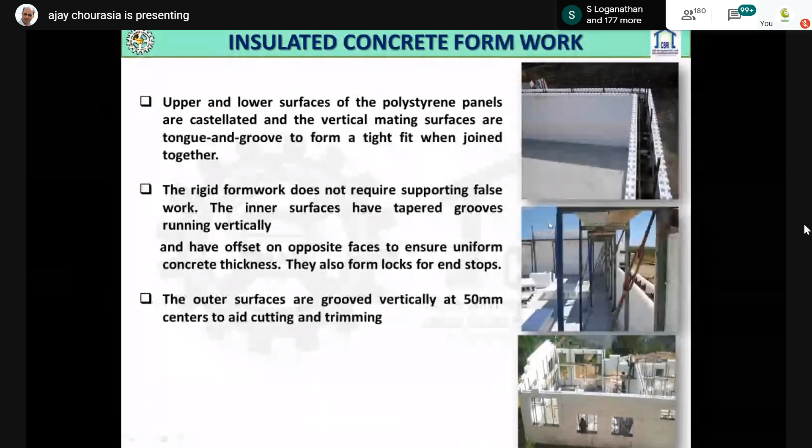So these are some of the pictures of actual execution of insulated concrete formwork systems; basically it is an Australian building system. It has been approved by the BMTPC, which is the sole agency approving all these technologies. Definitely CBRI is on board in advising the BMTPC in selection of appropriate technologies. Now I will come to the next one, whatever technology we discussed.

The limitation of prefabricated technologies is that they cannot be used for a single unit, 1 or 2 units, but have to be done on a mass scale. That's why it is a very promising technology for mass housing construction. Definitely advantages are there, but when you are looking from the point of view of safety, serviceability, economy, robustness, rebuildability, reconstructability, sustainability, you have to see all these things. So these are all aiming at functionality.

Whatever technology you give to the users, it should be functionally efficient, and that's why in CBRI we have implemented all the technologies in one park we have developed. You are all welcome to CBRI to see this park, in which 2-story buildings have been constructed having the same geometrical dimensions and elevations, but the technologies are different. They are not only being constructed but evaluated for axial load, lateral load, and water tightness, because in all prefabricated technologies water leakage is a great issue. Then thermal conductivity, acoustic comfort,

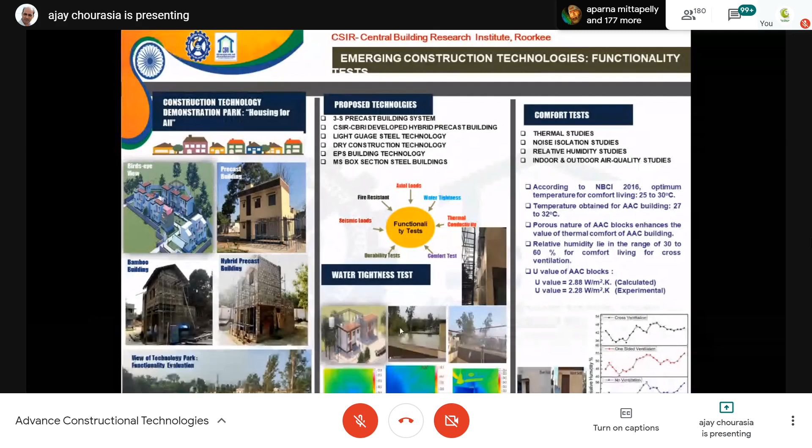Now, these blue sky technologies are at the moment in an evolution stage, but maybe 10 to 15 years down the line, definitely this particular technology will be the technology which will be adopted, in which basically the challenge is material design, because more flowable material, self-compacting concrete, should be there. Flowability, or slump when you talk about it, should be 300 mm slump.

And then material selection is very important. For that purpose, you have to add certain additives. Apart from that, you need a pump. And after the pump, you have to do the concrete printing. What exactly is 3D concrete printing? It is nothing but construction of a building or building systems layer by layer, not manually but mechanically, at a defined pace and as per the design procedure, as per the architecture.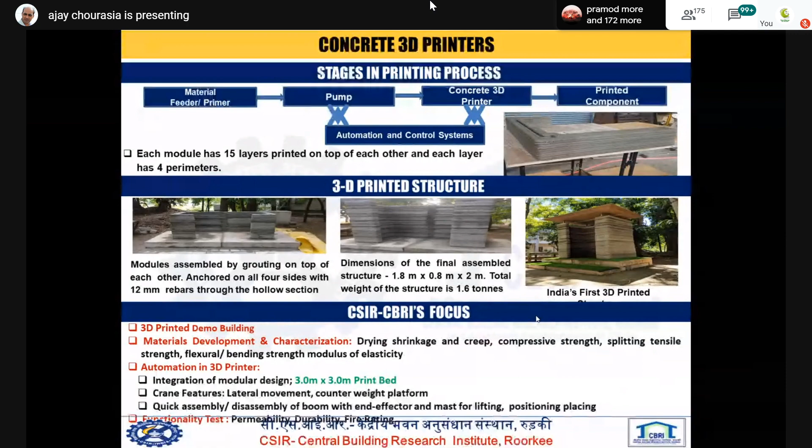Before closing up, I will say that prefabricated buildings for housing is a promising technology for mass housing. Limitations I have broadly discussed with you, and definitely it is saving a lot in terms of safety, speed, and sustainability. It should be safe, and I'm not saying safe only from the earthquake point of view, but from a multi-hazard point of view. It should be proven technology. To do that, the case study I have presented has to be adopted in all the building systems.

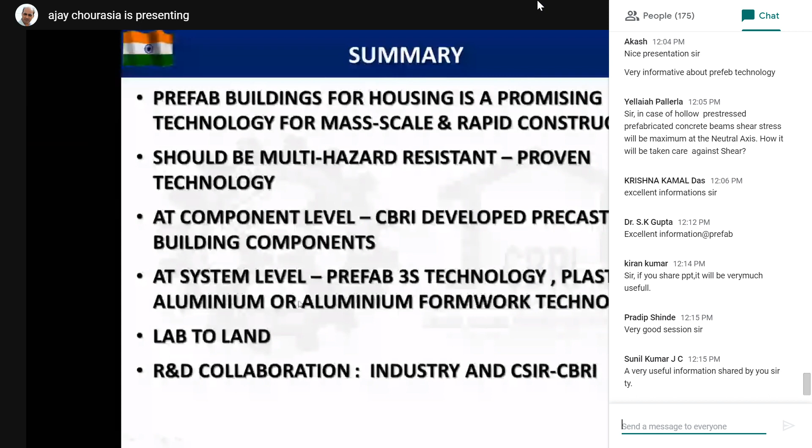We should not recommend or implement any kind of building system in practice before its clearance from the laboratory. Otherwise, a good technology today may give a bad name tomorrow. At component level, extensive work not only in CBRI but elsewhere has been done. But now it is time to switch over from component to system level. There are a few technologies I discussed which are good and can be adopted on a case to case basis, and this is how we have to take the technologies from lab to land.

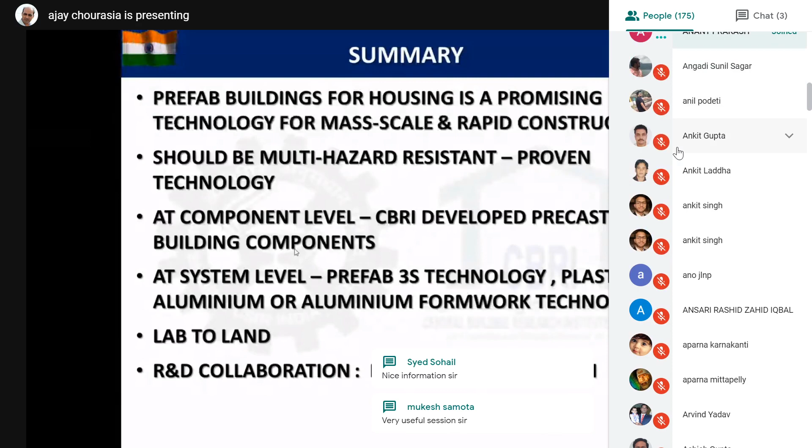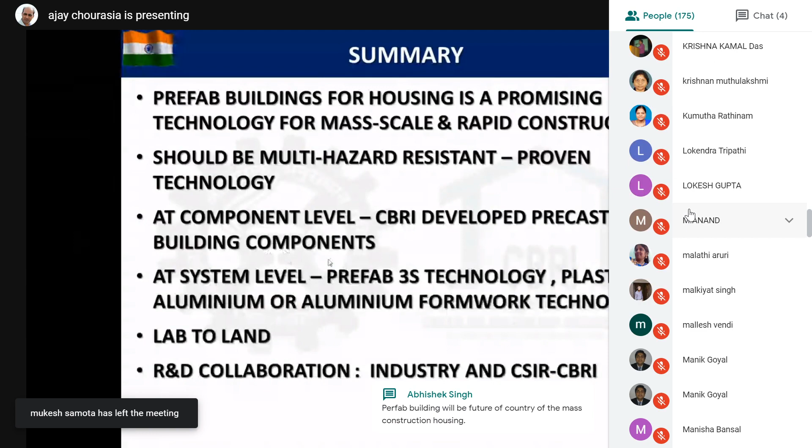For that, the Ministry of Housing and Urban Affairs is also putting extensive effort in bringing these technologies to the land in mass housing projects, and for that purpose R&D intervention is a prime concern. And before closing, I will say that in this COVID-19 scenario, let us take a pledge that through technologies we can learn new things. This is an opportunity for all of us to learn new things. That's why we are conducting this webinar. Otherwise, I would have come to Chandigarh and spent my one day, and so this is how the technologies can be put to practice.

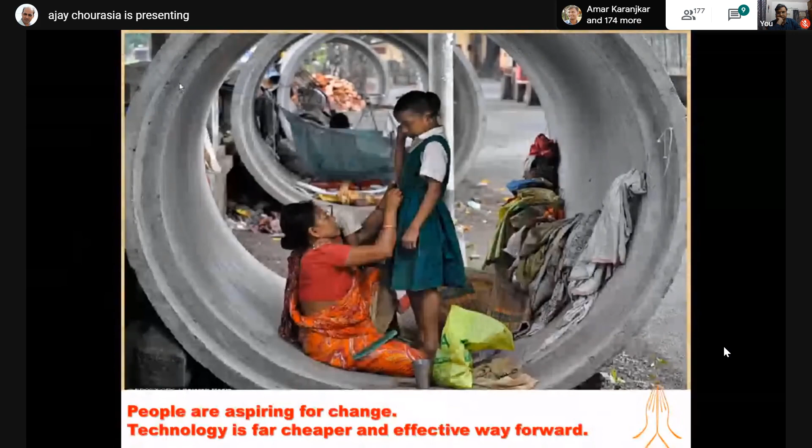And now it is your job to take these technologies to practice. In summary, our details are here. So basically, it is a journey which continues towards perfection, and for that, everybody has to take a pledge. Ultimately, when you put your research outcome to the field, people are aspiring for change. Technology is a cheaper and effective way forward, and you have an opportunity to take your expertise and intellect through technologies to the common man. And when you see a single drop of water in the eyes of a needy person, I think your purpose of taking birth on this land will be served.

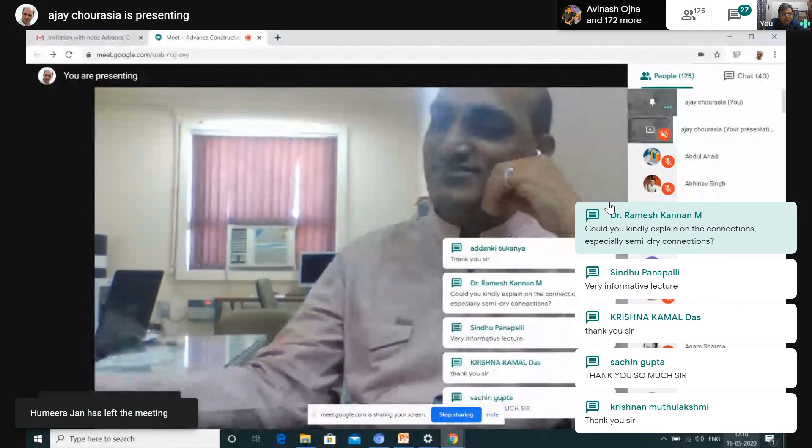Could you kindly explain the connections, especially semi-dry connections? Connections, good question. So there are wet connections and dry connections. These are the two types of connections being adopted. In most steel structures, you are adopting welding. What is the difference between wet and dry? Whenever you are making use of water, in a very simplistic form, it is called a wet connection, and otherwise it is a dry connection.

Preferably in steel structures, we are making use of welding, bolting, or male-female joints. So these are in the dry connections category. Whereas in RCC frame structures, as I have presented, two elements are connected by placing additional anchorage bars, or otherwise headed bars or couplers.

And then what we are doing, we are pouring a self-compacting concrete to achieve monolithic action between the precast and cast-in-situ elements. This is classified under wet connections, while the previous one is dry connections. Dry connections are predominantly used in steel structures, which is why that technology is called dry construction technology. Generally in RCC frame structures, we use wet connections, and to achieve the connections better, we have couplers.